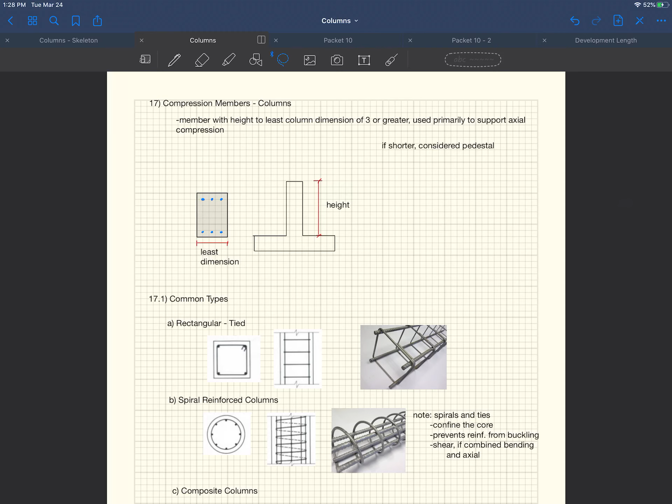We're going to start talking about columns here. So this is the format I'm going to do. Okay, I'm going to try to post a lecture by the time we usually have class, right, on Monday, Wednesday, and Friday at the time we typically meet, 2 o'clock. By then, there should be a lecture for the day.

I might try to pre-record some of the lectures as we're stuck at home and locked. I'm currently locked in my office, the door shut, and have no interaction with anybody outside of my roommates. But obviously those are my kids. But so I have a little bit of time on my hands, so I might try to pre-record some lectures

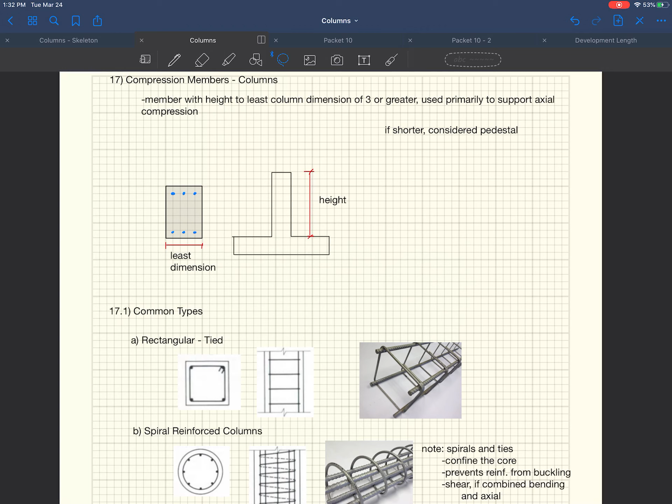So this is what I'm going to do. I'm just going to record this screen, right? This is usually what you see up on the board. You can't see my face. You'll see my face. Excuse me. Let's see here. Can you? Let's see here.

Hey, what you guys doing? Okay. Sitting in my office, hanging out, all by myself. So, by the way, this is way stranger for me than it is for you, right? It's a little strange for you to be watching this video of the lecture, but I'm sitting in my office completely by myself, talking as if you're sitting right in front of me. So, it's a little strange experience, but I have done it before. It seems to work all right, right? If anything, it might be a little bit better for you because then you can fast forward me, you can pause me, you can rewind, whatever you need to do. So, like I said, I think that this will work out pretty well.

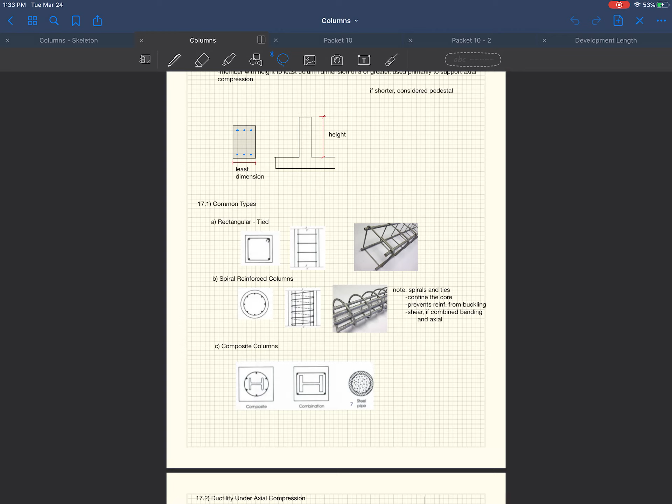So hopefully you guys are staying safe, staying entertained, right? And hopefully nobody has fallen ill and whatnot. It's a little scary times, but I think everything's going to be okay, right?

It's very interesting times, and maybe I mentioned this before, right? This is a big deal, right? I think you'll always remember this time in your life as being scary or whatever, but everybody's just kind of hiding out, slowing down, and to be honest, just enjoying life a little bit more once everything slows down. I've gotten to know my roommates a lot better lately, right? My kids and my family, we've been spending quite a bit of time with each other, and it's actually been quite pleasant.

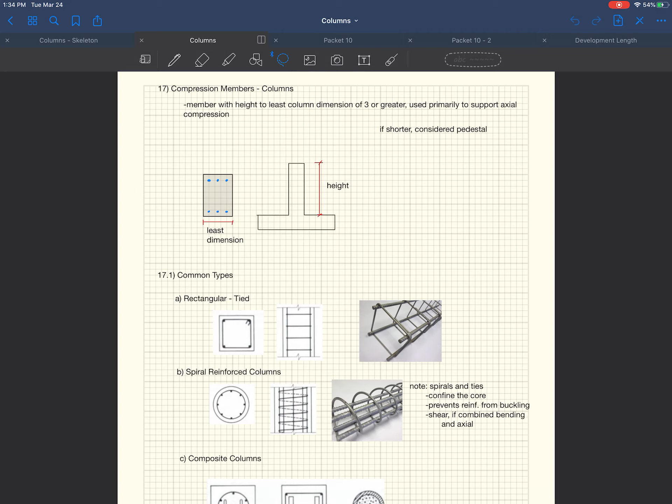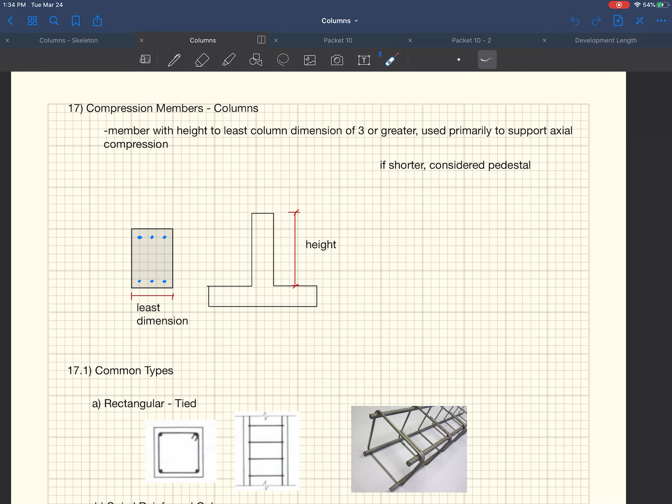So we were talking columns, right? This is actually something I know a lot about. This is what my dissertation was on. So just a quick review of where we stand. We were looking at short columns, concentrically loaded short columns. So they have to be a certain height to width ratio. Otherwise, they fall under a different category, like pedestal design as opposed to column design. And so we kind of defined what that was.

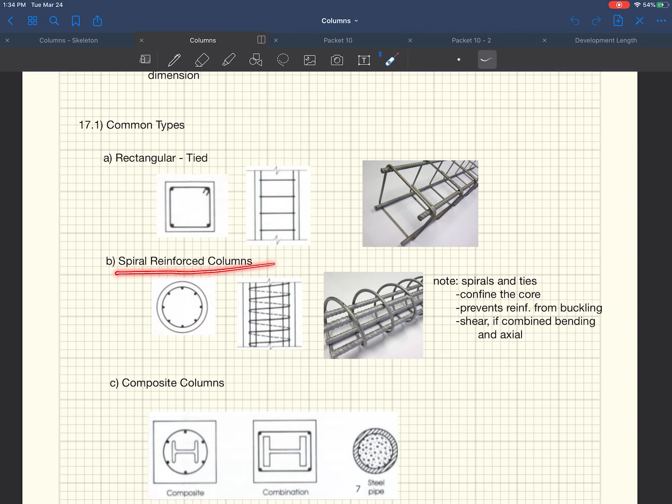We talked about rectangular tied columns versus spiral reinforced columns. These guys are better. As you're going to see in those videos, hopefully with the post today, the spiral columns behave better. The ties go around like that, and then they kind of splice, they overlap a little bit there, and they're just not as effective. Your intuition should say the spiral is one continuous bar the whole time, just holding things together, and it does a lot better than these ties. Typically, you find ties in rectangular columns, and in circles, you'll find spirals.

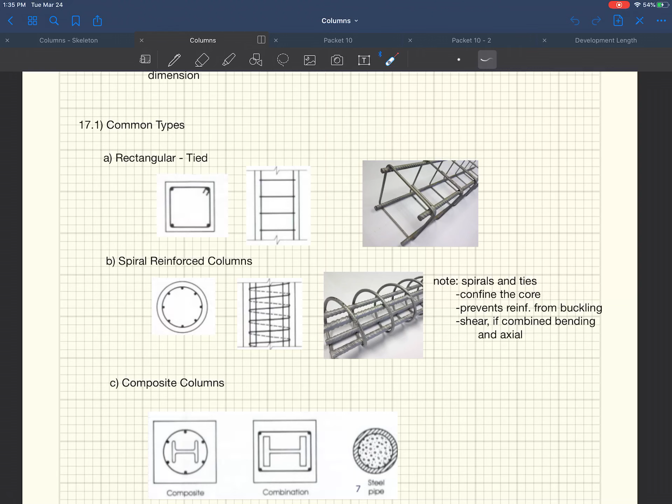The purpose of these ties and spirals is to confine the core. When you squish the concrete, Poisson's effect makes it want to squish out on the side, which causes tensile stresses, which then cause failures. To resist that, you put in these ties going across, and it holds the middle together. It wants to bulge out, and the ties or the one continuous spiral hold all the reinforcement and the core together. By holding that core together, you get a higher capacity.

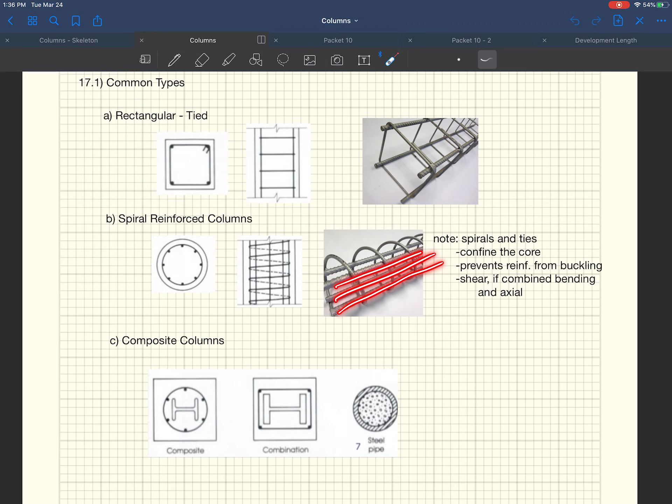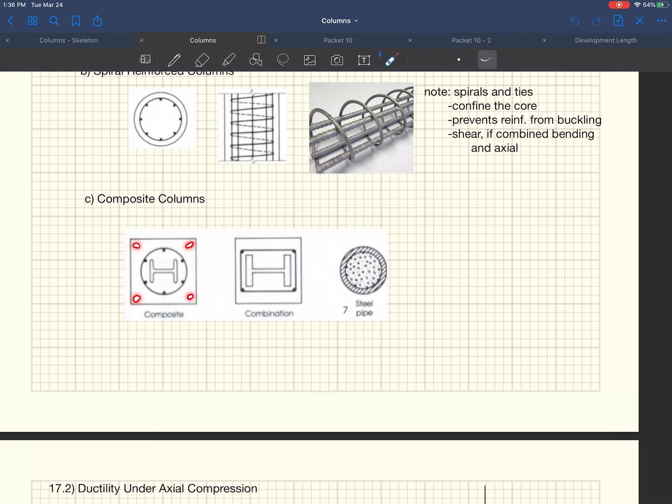The other thing it does is prevent these bars from buckling. Those bars want to buckle out under compression, but the ties keep them from buckling out. We also talked about composite columns. You could put an I-beam inside a spiral, inside regular reinforced concrete, and that works pretty well. But the concrete can spall off on the sides. Same thing with encasing a steel beam in concrete; they use that on occasion.

More popular, though, is to have the steel pipe on the outside and fill the pipe with concrete. Works beautifully together. The concrete prevents the pipe from buckling, and likewise, when the concrete wants to bulge out through Poisson's effect, the pipe holds it all together, and you get beautiful response out of this.

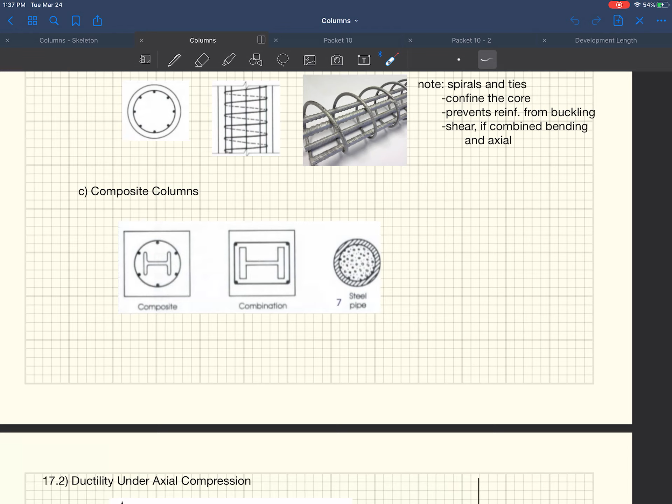We have a research project with MDT right now, looking at connections between steel pipe piles and concrete-filled steel tubes and concrete pile caps. We're going to be testing a large-scale specimen that looks like this, and push on the top of it until we get failure. That will hopefully be going down this summer, assuming we're ever let out of our houses and offices, but if not, it'll start next fall.

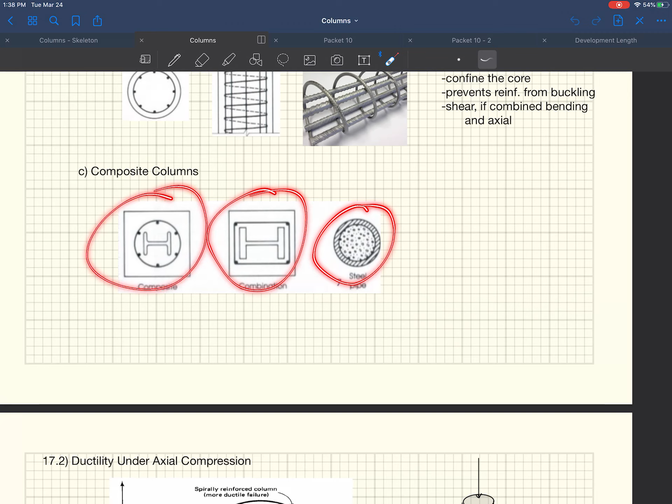We're not really going to talk about the design of these; I just wanted you to know they exist. We're going to be talking about the design of rectangular tied columns and spiral reinforced columns. That's as far as we made it on that Wednesday before spring break. So we'll just keep going with these notes. This is what that lab was designed to show you.

When you apply a load, so this is exactly what we're going to do with our lab, you made a couple different versions of columns. When you apply an axial load, this is just like testing our cylinders, right? You apply a load until this thing squishes. And so if you monitor how much force you applied and how much it displaces, and you plotted it on a graph, this is what it looked like. And this is very similar to beams as well.

Just regular concrete without any reinforcement would go like this. It hits about its ultimate capacity, and it ruptures, or it breaks. That's just like if you're testing a cylinder. So your column that you made in lab should fail like that, in a very brittle fashion, no warning whatsoever, and then it loses its capacity.

If you include ties in there where you confine the core, I'm going to draw it in green here, it would look like this guy. That's this graph right here. And so you get a little bit more ductility. And where do you get the extra ductility? Well, these ties are kind of holding the core together.

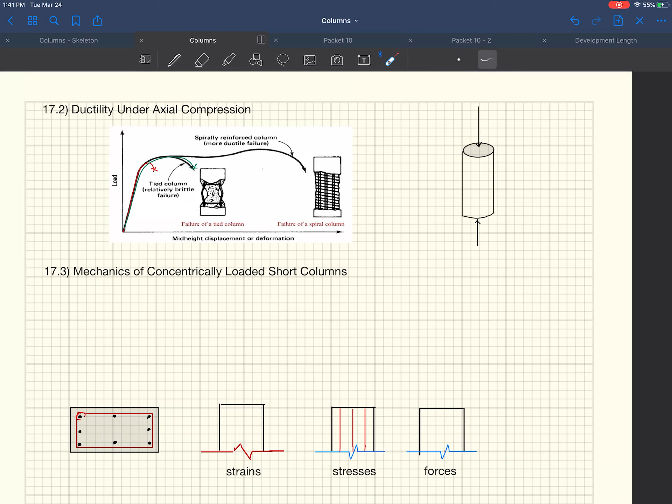So anyways, we keep going here. Mechanics of concentrically loaded short columns. So how do these things behave? We haven't talked about calculating the capacity of these things yet. We just talked about the different types of behavior at this point. And so how do these things behave? And in particular, we're only going to look at one type of column. We're going to look at concentrically loaded.

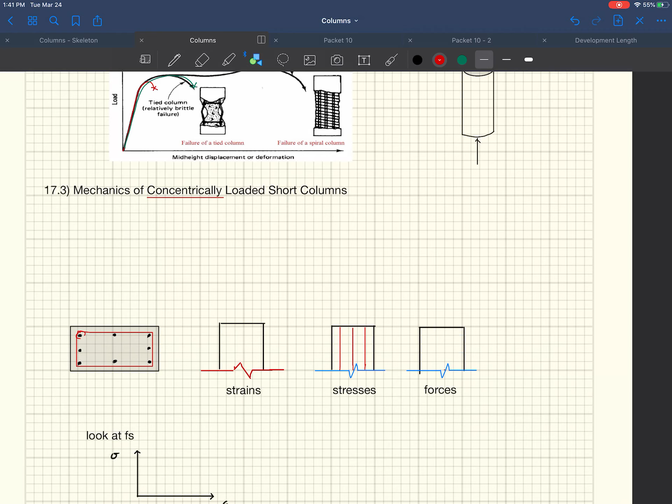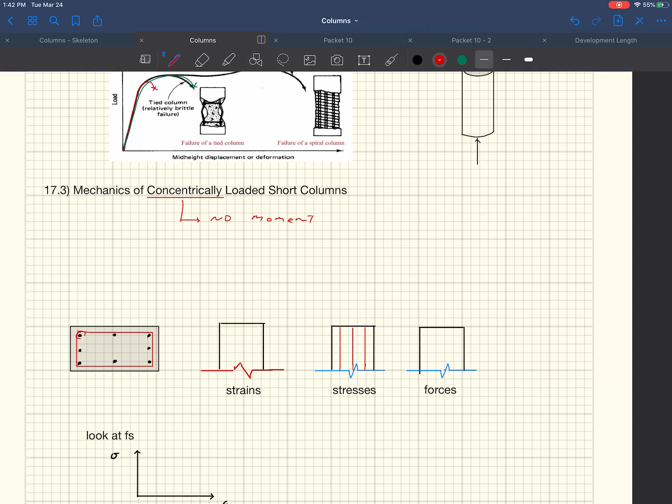So this means we get no moment. No external moment on it. Concentric means you loaded this thing up perfectly. So in this guy right here, if that thing's lined up right in the middle, then that's a concentrically loaded column. If it was off center, that would be an eccentrically loaded column.

We're not going to do eccentrically loaded columns because that's going to have bending and axial load on it at the same time, and so we're just going to do concentrically loaded short columns. And then in this, the short columns here.

I was almost asking you guys a question. So why do you think these things are called short columns? Why are these things called short columns? Well, it's funny that you asked that. Thank you for asking that question. The reason we're only looking at short columns is that we don't have to deal with buckling. No buckling.

Right? As your column gets longer, that becomes a failure mechanism. When we go to steel design, one of the failure mechanisms that we're going to have is buckling, right? You have very thin flanges and thin web. Steel's really strong, 60 KSI versus the 4 KSI that concrete has. 60 KSI is its yield capacity.

60 KSI, right, you get to make your members smaller. If you make your members smaller, they become more susceptible to buckling and stability issues, right? But columns are usually big and fat and massive, and so we don't really have to worry about buckling. Obviously, if you have a really long column, you do have to design for it, but that's beyond the scope of what I'm going to teach you in class here.

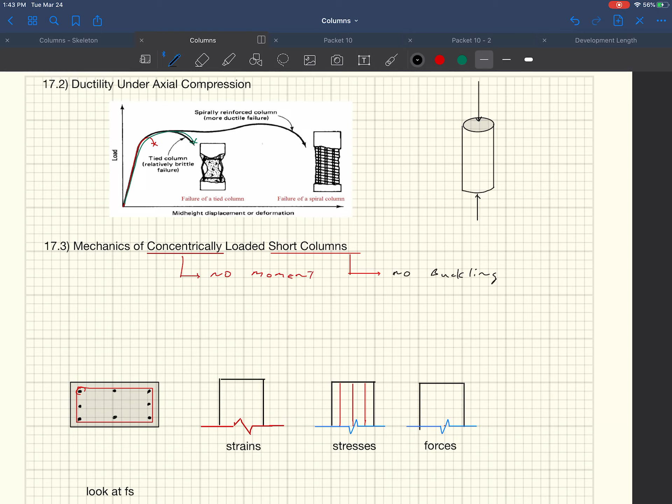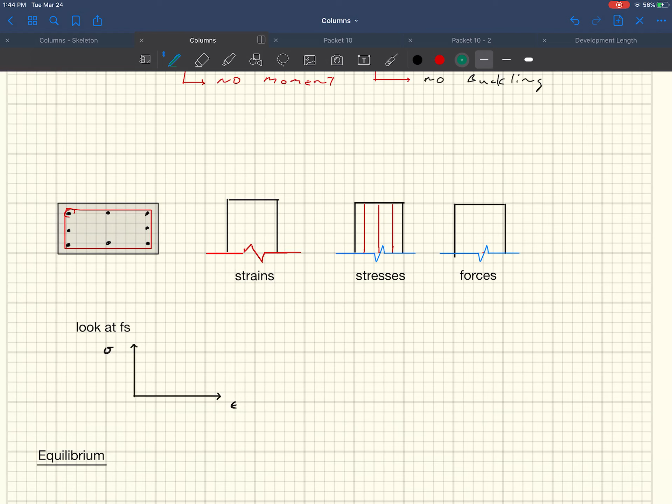So concentrically loaded, we have no moment. For short columns, we're not going to consider buckling as one of the failure mechanisms. Okay, so the equation for calculating the capacity is very similar to what we did for beams, right? We start out with strains, then go to stresses, and then look at forces, okay? And then from that, we're going to derive an equation.

So the very first thing is when we apply an axial load, right? This right here is the cross-sectional view. So if you're looking down on it like that, and then this is looking at this thing from the side. So I guess it may be looking at it this way, because I drew it a little bit narrower. So we're applying a load down right here, and then we're looking at it this way, right?

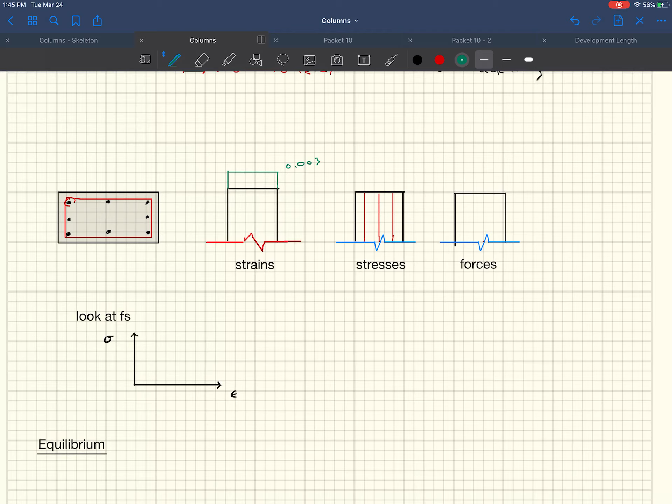And so ultimately how we're going to say that this concrete fails is that it reaches a compression strain of 0.003, right? You may remember that from beams, that we have a strain of 0.003. At that point, the concrete crushes. When we tested all of our beams, that was the failure mechanism for the under-reinforced, ductile failure, or normal beam rather. It failed when the concrete reached a strain of 0.003 and crushed at the top. And so we're going to assume that the concrete crushes at a strain of 0.003, okay?

If we want the ultimate capacity, that's what's going to govern it, right? As soon as that concrete crushes, you're not going to be able to carry that capacity anymore. And the other thing that's different about columns versus beams: when we did beams, we had compression on one side and tension on the other side, right? That's for axial load and bending. But for these guys, it's just a uniform compression strain, because there is no moment on this thing. We just apply the load.

Now, if we then come over here and look at the stresses, we'll show down being the compression. So each steel member is going to have an FS, and they should all be about the same length here because they're all concentrically loaded. They're all under the same stresses here. I'm going to move this a little bit. Okay, and so you have each one of those things.

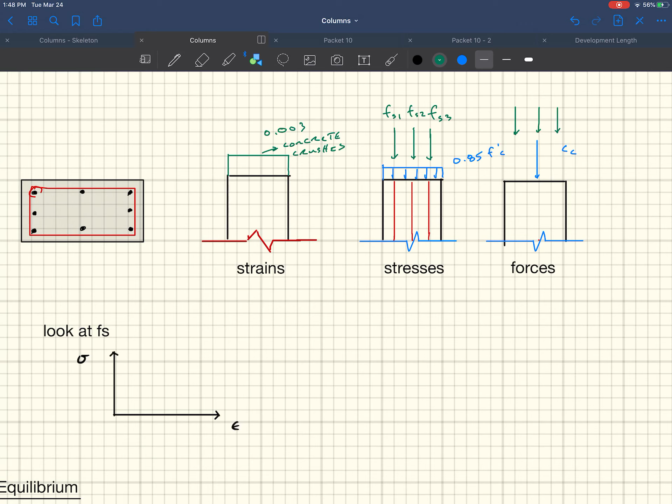Mostly. Okay. And so you're going to have CS1.